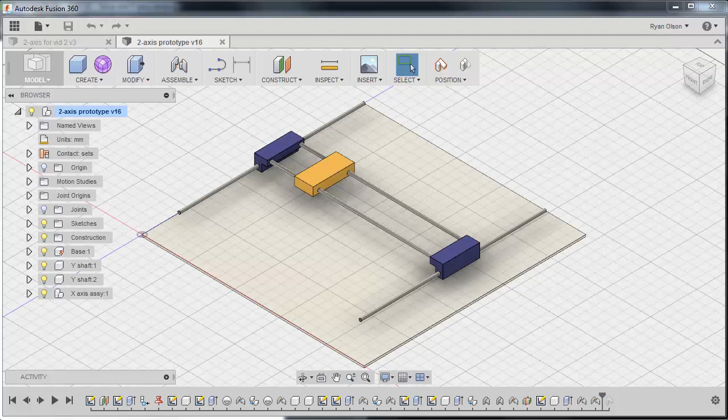I'm a product design engineer who's been using SolidWorks for about 9 or 10 years now. And recently I've been experimenting with a relatively new software package put out by Autodesk called Fusion 360. I think this package has a lot of potential, but it does require you to think a little bit differently from the way we're used to thinking in SolidWorks, Pro-E, Inventor, packages like that.

So with that in mind, I decided to put together this video series that shows the process of working through some modeling exercises in Fusion 360, specifically with a concentration on the way that some of the workflow and thinking changes for those of us coming over from a package like SolidWorks.

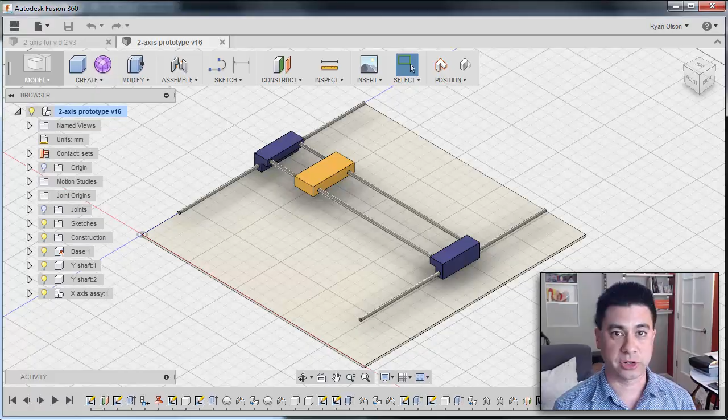So for this modeling exercise, I thought it might be useful to look at something like a very simple two-axis CNC machine. This is something that might be the basis for like a laser cutter or something like that. Certainly nothing revolutionary in terms of the design. It's very simple, but it gives us a lot of opportunities to look at different things in Fusion 360 related to the way that you would put together an assembly, the idea of mates or joints, and the whole idea of modeling in place, which is a big deal in Fusion 360.

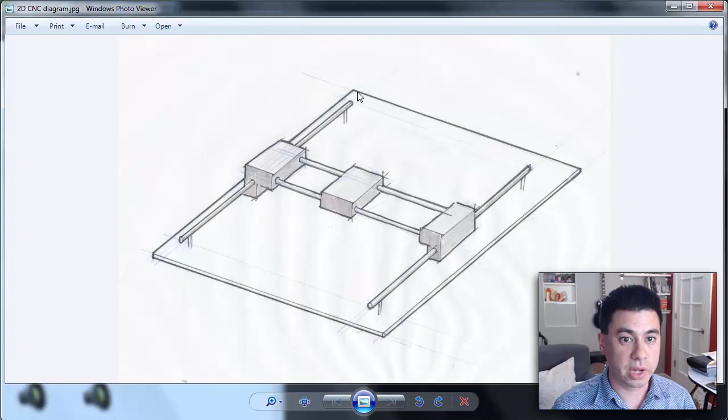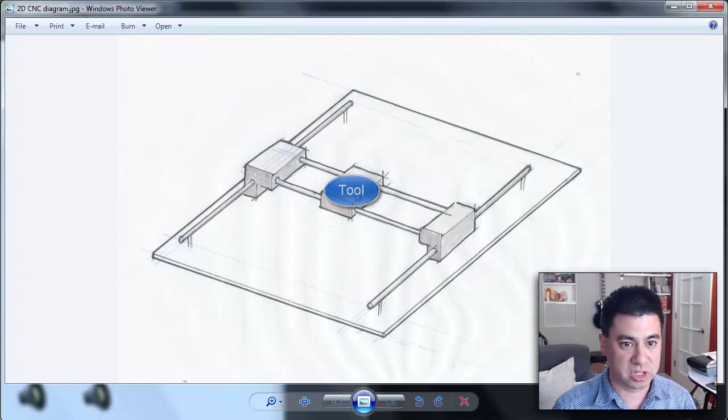So basically what we've got here is a tool bed, a couple of shafts which define the y-axis, and along those shafts run this subassembly that's the x-axis carriage assembly. So it'll slide in the y direction. The sled on the x-axis assembly can slide in the x direction, and that allows the tool, whether it's a laser or mill bit or whatever, that's on this sled to move anywhere in 2D around the tool bed.

We'll begin by defining a guide sketch, which will define the location of key components in our main assembly. We'll begin with a tool bed size approximately 600 by 600 millimeters. We'll also define two lines which will show us where the y-axis shafts lie with respect to the tool bed.

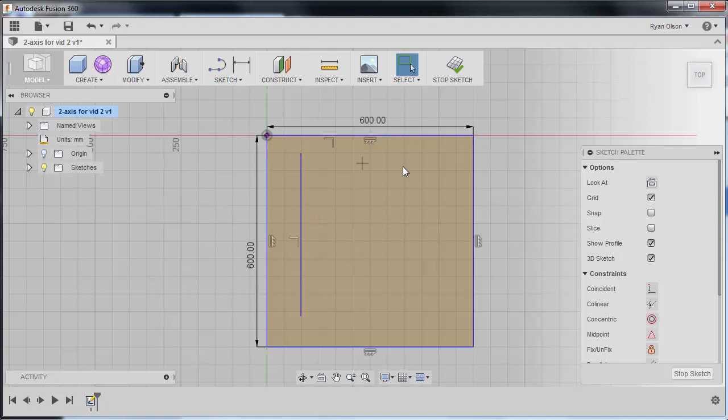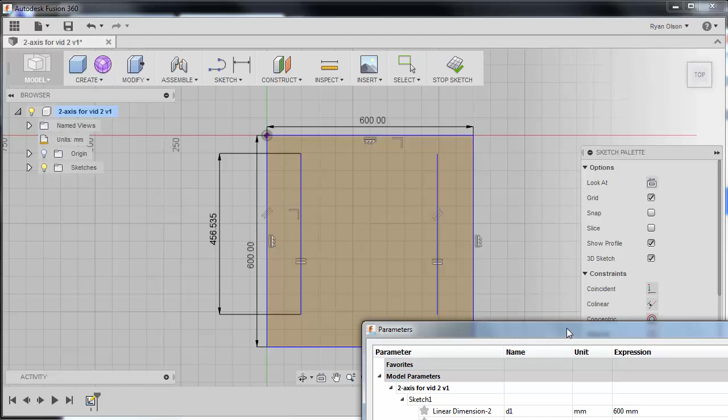We'll set these two shafts to be the same length. In this case, we'll be making these shafts from stock material we already have on hand, so it's our design intent for these shafts to be of a specific arbitrary length. We'll codify that design intent by setting up user parameters which define the length of these shafts. We'll define a new user parameter that represents the length of the y-axis shaft, and then assign the dimension from the sketch to use that parameter as its value.

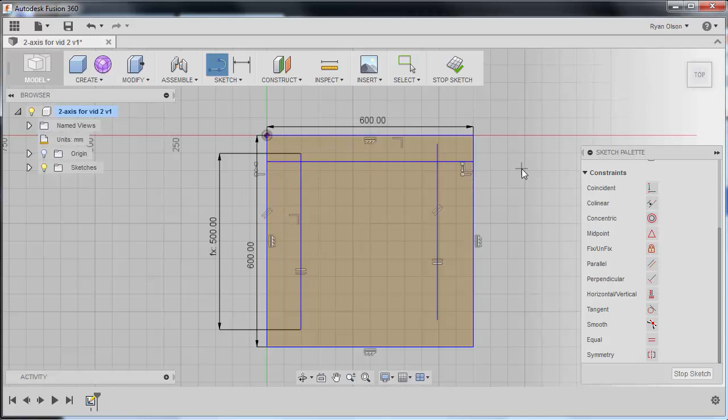At this point, we want to set up the positions of these y-axis shafts so that they are centered between the front and back of the bed. So we'll set up some guidelines to do that. There are several ways to position these guidelines such that the y-axis shafts are centered between the front and back of the bed, but in this case, let's do it using a formula.

We also need to define the amount that each y-axis shaft is inset from the edge of the bed. Normally I would do this with reference planes in SolidWorks, but in Fusion 360 it's easier to do this in a guide sketch, as you'll see later.

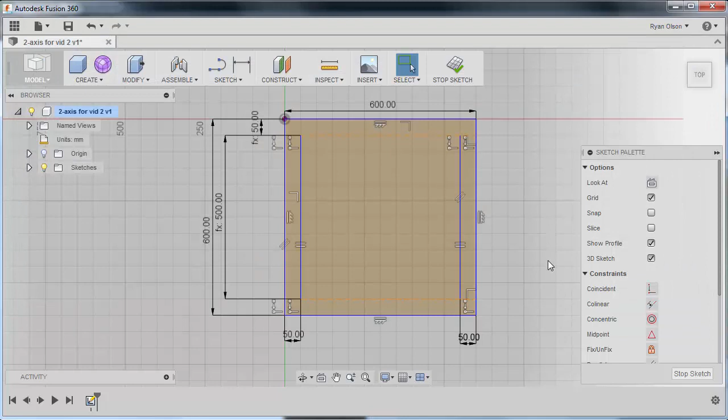Since I'll most likely be changing this as the design evolves, I'm going to favorite these two dimensions. This way they show up at the top of the list and I can find them easily. That's enough for this guide sketch for now. Let's go ahead and rename this guide sketch so that we can find it easily.

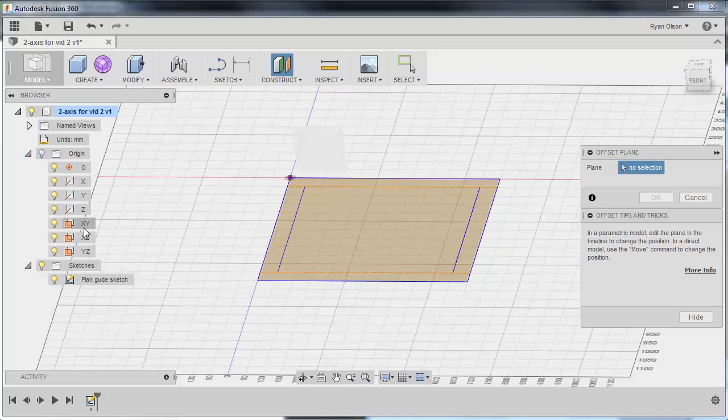The next step is to define a plane which will tell us how high above the bed the y-axis assembly resides. We can do this with an offset plane. Since this plane offset dimension is something that we're likely going to be changing during the development of the model, it can be useful to label that dimension.

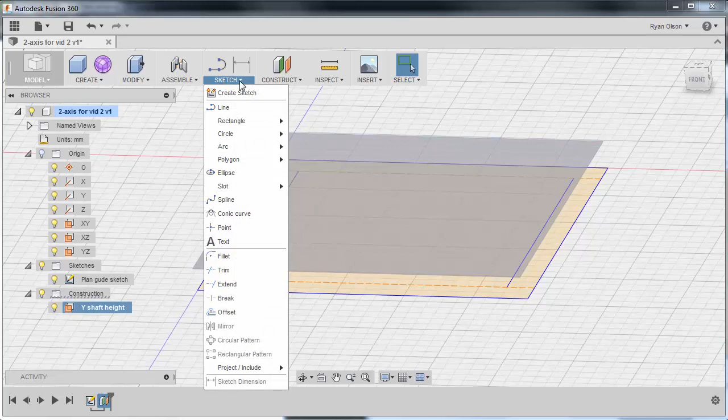Now that we have a plane defined for where we want to put the y-axes, we can project our two y-axis position lines onto that plane so that the lines will be in the right place in 3 dimensions. We'll use the project tool in the sketch interface, which works a lot like convert entities in SolidWorks. These 2 lines on this new sketch now represent where we want the Y shaft components to be in 3D.

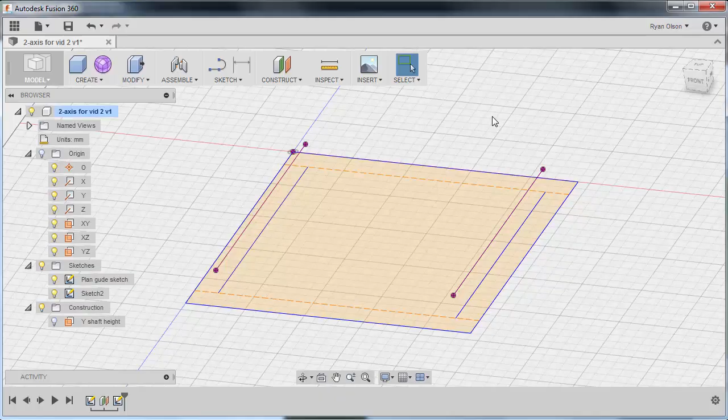At this point we should start adding some components to the assembly, so let's start with the tool bed itself. There are a few different ways to create components in Fusion 360, so I'll start with the most basic, which is creating a body and then converting it to a component.

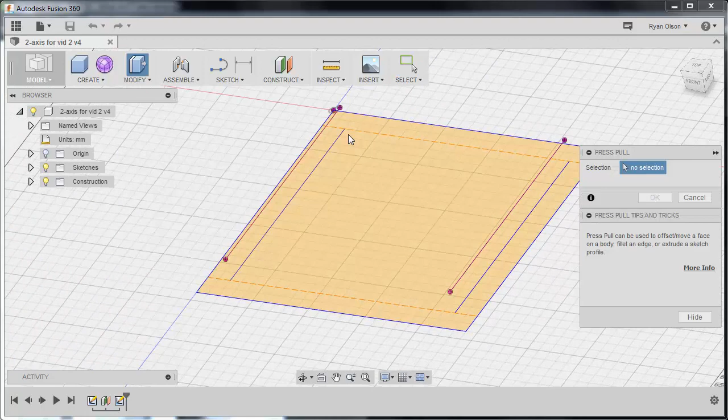We've now created a body at the top level of the assembly, but it's not yet its own component. By creating the component from the body, it is now absorbed into a new component, and the component is positioned where we want it.

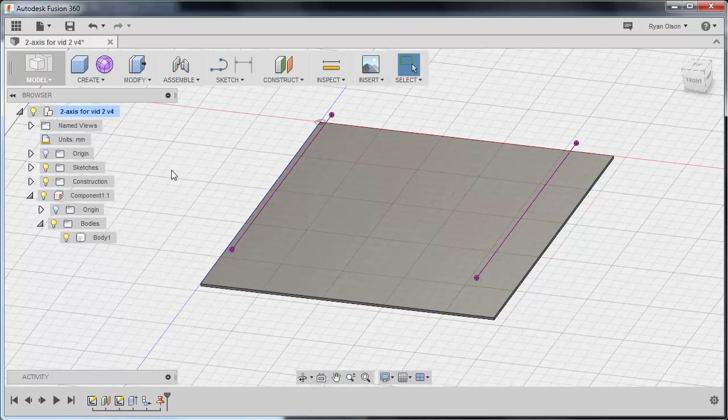In this case, we don't want the tool bed component to move relative to the origin of the assembly, so we're going to ground it, which is like fixing a component in SolidWorks. We'll go ahead and give this component an appropriate name and then hide it so that we can add the 2 y-axis shafts.

We can now look at a couple different ways of adding the Y-shaft components. SolidWorks users such as myself might be inclined to do it by creating a new component and then positioning that component within the assembly in the place that we want. And indeed, that is possible in Fusion 360, as I'll show here.

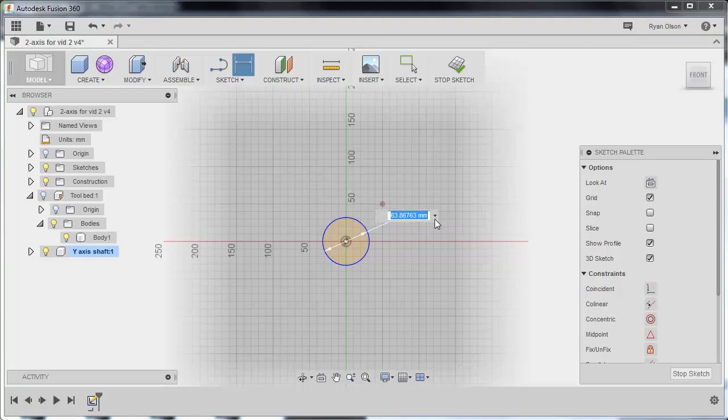We'll create a new component. We'll activate the component to make sure that we're working within this component. While we're dimensioning the shaft diameter, we should probably set up another user parameter, since this is something that could also change through the evolution of the design.

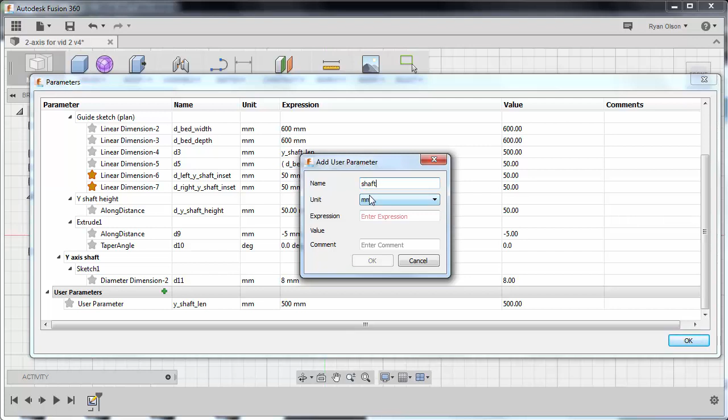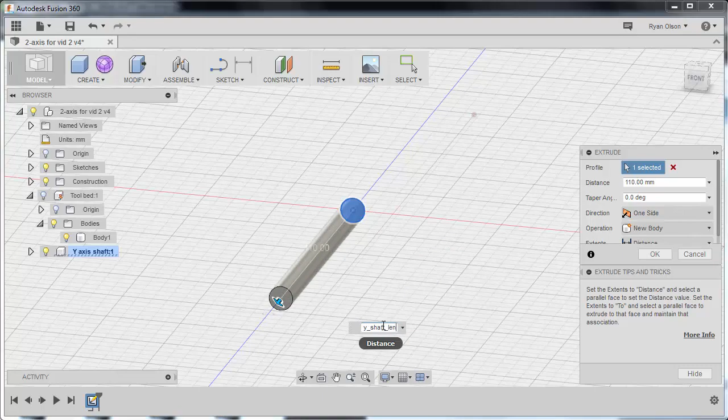Now that we have our profile sketch, we can extrude it to create a shaft of the desired length. We now have a component with its origin at the assembly origin that contains one body, which is a shaft of the proper dimensions. However, it's not yet positioned correctly in the context of the assembly.

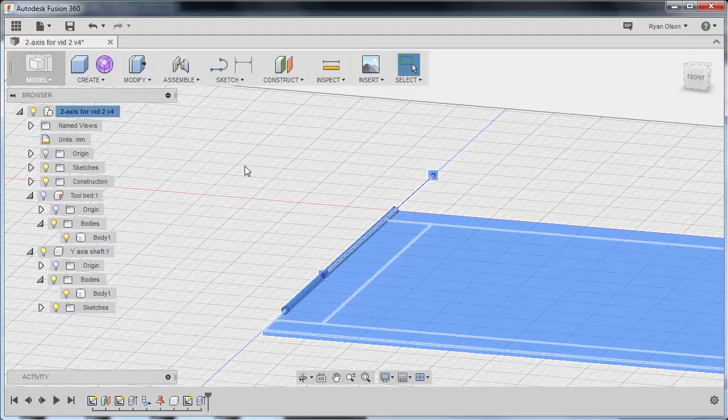Since the component isn't mated or jointed to anything, we can move it freely within the assembly at this point. However, notice that once we do move it, we have the option to revert it to the original position or create a snapshot feature which will record the new position of the component. This will become very important later on.

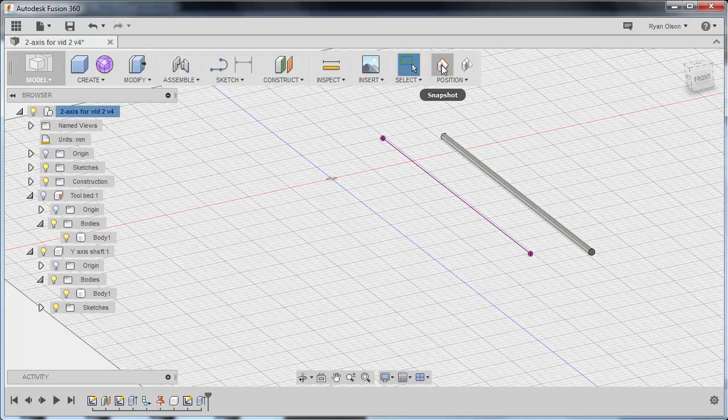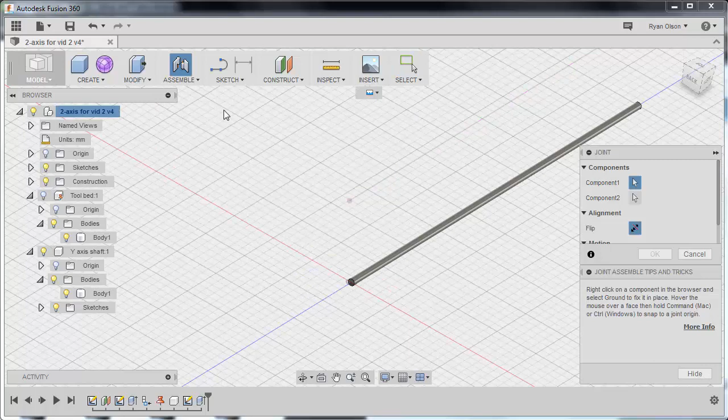What we want to do here is to mate this component with the y-axis guideline that we created before. This can be done using a rigid joint. As you can see, we've got the location right, but the orientation of the joint is wrong. This is because the joint origins of this rigid joint aren't properly aligned. We can fix this easily by adding our own joint origin.

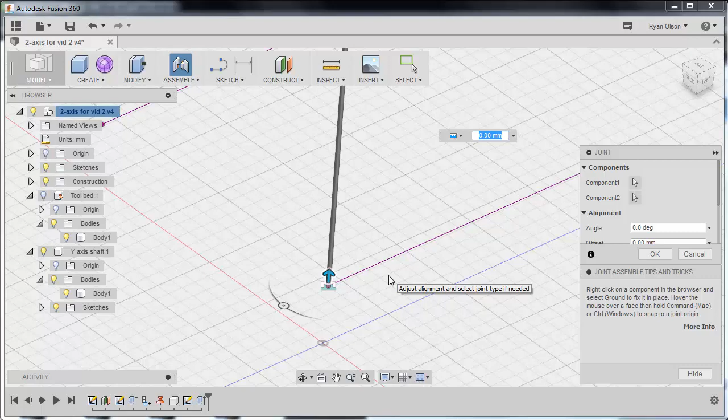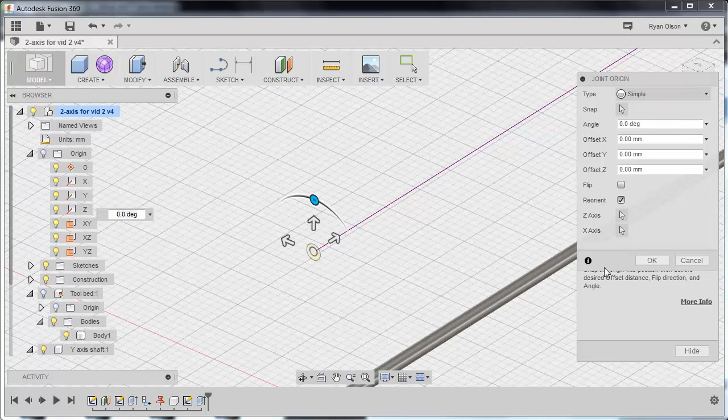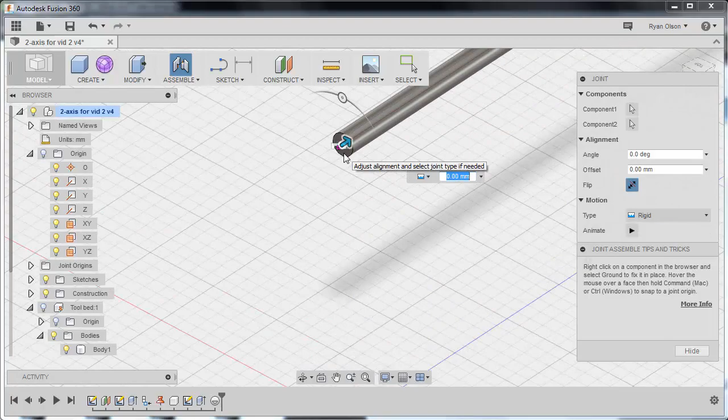The joint origin is now located where we want it to be, but we need to reorient it. Now that we have a custom joint origin in our assembly, it's an easy matter of mating the shaft component with that joint origin, which belongs to the parent assembly. This component is now rigidly jointed to the assembly and will follow these guidelines if we were to change them.

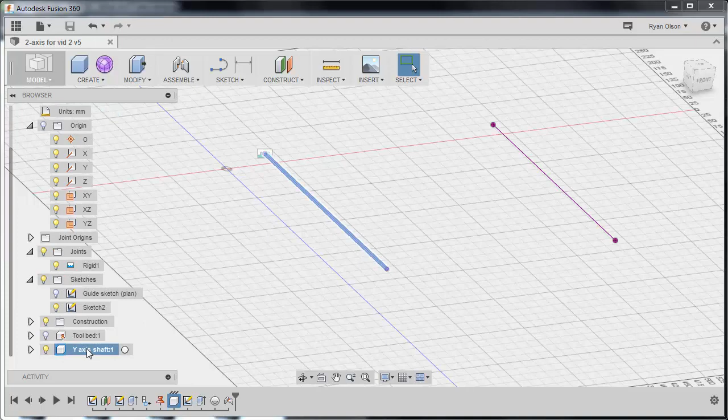We now want to place another instance of that component at the right-hand side Y-axis shaft location, which is simply a matter of doing a copy and paste. Control C, Control V. Now notice that I've moved it to approximately where I want it to be, but it's not yet jointed to this guide sketch. So if I were to change the sketch, the component wouldn't move with it. We need to set up the proper joint.

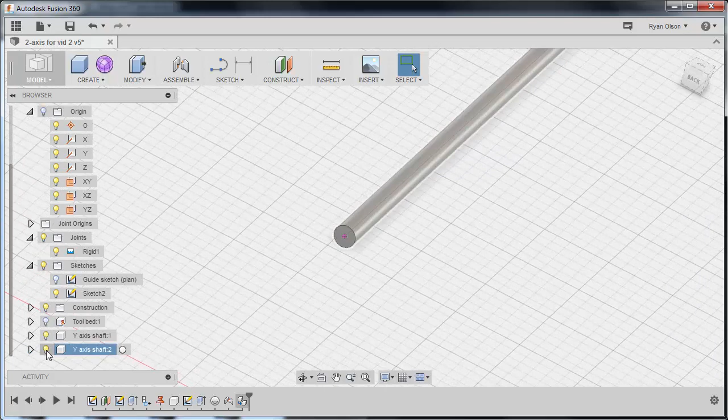To do that, I need to set up a joint origin on this guideline as well. And now we can establish the joint. Note that I've moved it out of the way temporarily just so that it's easier for me to click on this, but I'll get a warning about the fact that I've changed the component's position as I do the joint.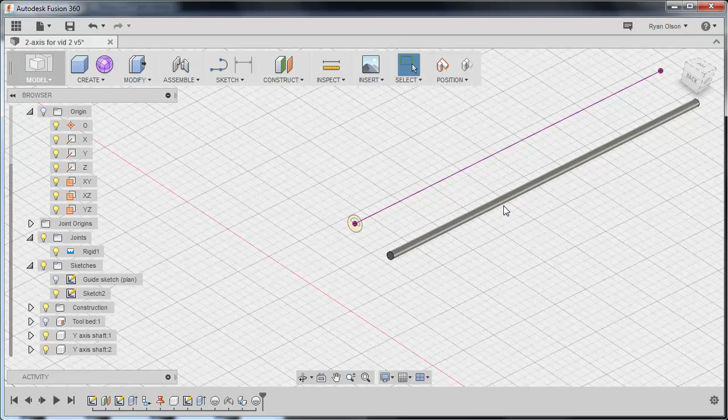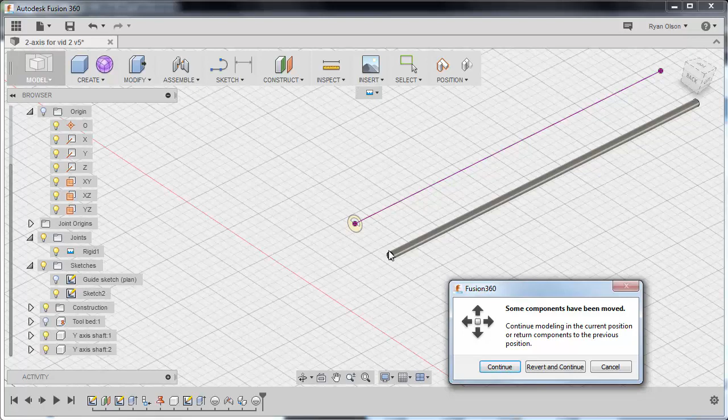So this warning that comes up is basically just reminding me that I've manually moved this component from the position in which it was originally created, which was through that copy operation. And it's asking, do I want to put it back where it was in terms of the feature tree, or do I want to continue with where I've moved it? And in this case, I just want to continue because I moved it just to be able to select it more easily. So the first component is the one that's going to move. I'm mating it to my new joint origin.

And now both of these are in place. It is important to note that these are two instances of the same component. Even though I used a copy operation to create the second one, it didn't disassociate the second component from the first one.

So what I've shown here is a good approach to take if you're used to modeling components separately and then later bringing them into an assembly. Or if, for example, you've already got a model from somewhere else, or you're working off a model that was made to represent stock material you already have. This method of bringing it into the assembly and then establishing a rigid joint to a guide sketch is a

good way to go. However, Fusion 360 was really designed with in-place modeling in mind, and in a case like this, it can be a much more efficient approach to modeling. So I'll show how to do that next. Let's actually roll back here. We'll get rid of the shaft component that I had created, so I'll just roll it back and then say delete all features after history marker. And we'll go ahead and model this in place instead.

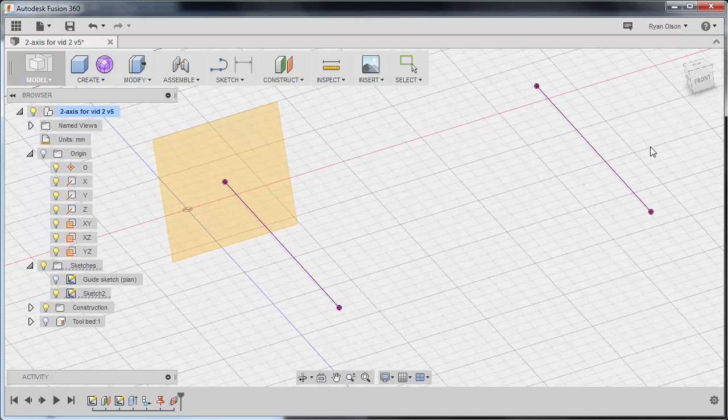Again, I have only one component, which is the tool bed. It's hidden right now. I'm working in the main assembly, and what I'm going to do is draw a sketch at this point and extrude it out to this point, therefore using the guide sketch to extrude the geometry. So the first thing I need is a plane. I can now sketch the profile on this plane. And I can extrude it out.

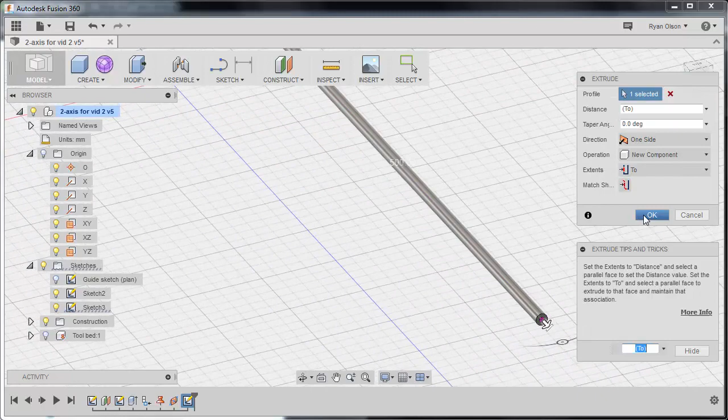A couple ways to approach this. I could either extrude it and use the to extent to go to this point, or I could extrude it at distance and type in my shaft length. It's basically going to end up with the same thing. More importantly though, for my operation, I want to say new component, so that I'll be creating this body and a new component to hold it in one operation. So with that one feature, I've got a new component which has in it the body of the shaft at the proper dimensions.

Now, even though we've modeled this component in place, it still actually isn't jointed to the assembly in the way that an in-place mate would lock down a component modeled in this way in SolidWorks. So it's simply a matter of adding what's called an as-built joint. So at this point I can still move the component around. It would remember the position and allow me to revert it, but I actually want a joint here. So we'll go up and do an as-built joint.

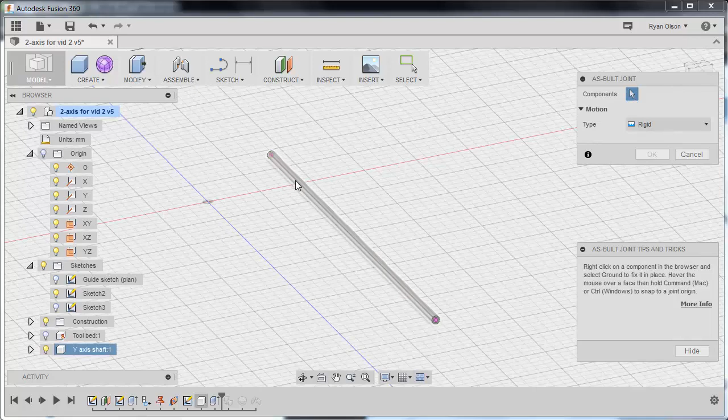And all I have to do is select the component and the parent component, which is the parent assembly, and click OK. At this point, the component is actually jointed to the guide geometry. And again, if we were to change anything about the guide geometry, the component would go with it. So for example, we could go and change the height of the Y shafts above the bed,

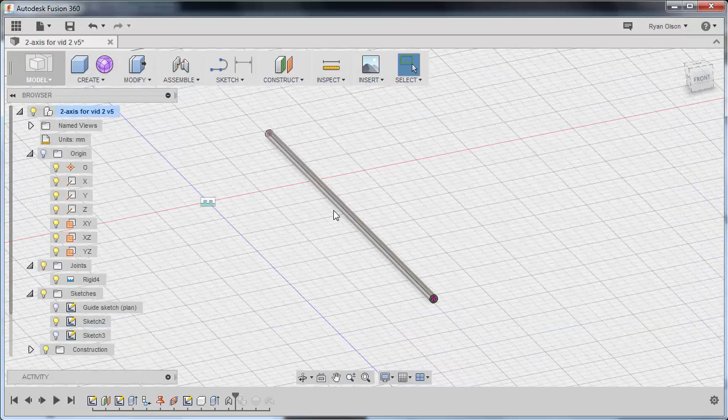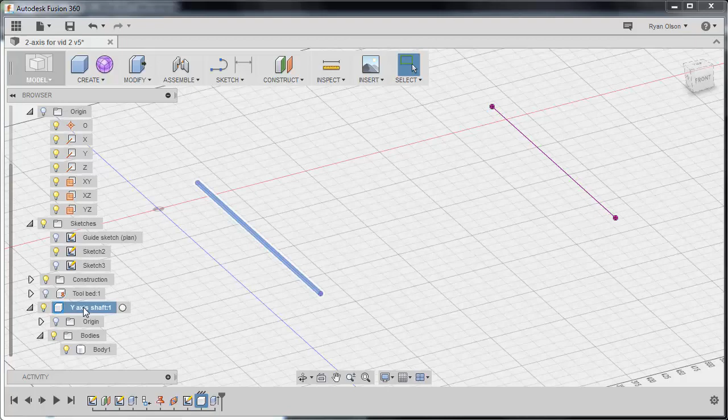and it updates accordingly. Now to create the shaft on the right-hand side, I could just create another component doing the same thing, but I really want these to be the same component. So I'm going to do the same copy operation that I did before and manually joint the second shaft to its location in the assembly. Control C, Control V.

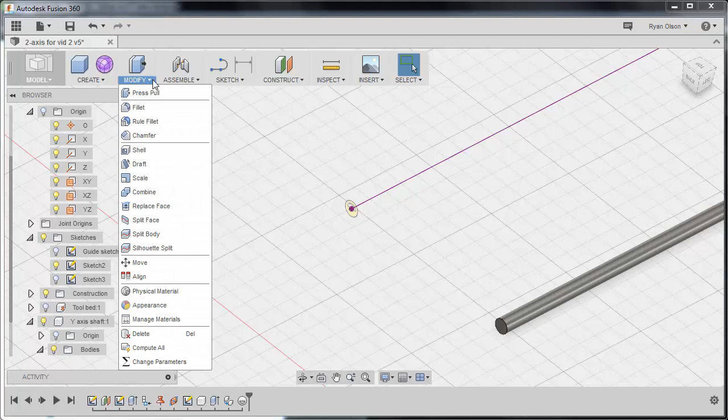Set up our joint origin. In this case, it appeared to allow me to select the origin in the orientation that I wanted, so I'm just going to go with that. I will admit I don't totally understand how these joint origins are selected and manipulated yet. And so you can see that I now have two instances of the y-axis shaft again in this assembly.

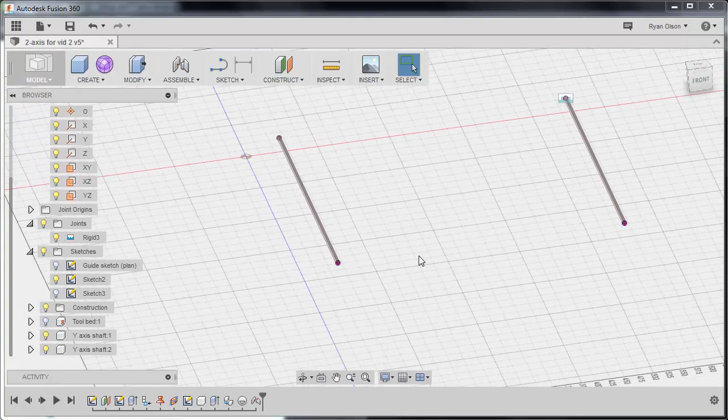So I think that's definitely enough for this video. In the next video, I'm going to show how we can start modeling some additional parts of these mechanisms, the sleds that slide along these axes, and the parametrically defined x-axis shafts whose length is determined by this guide geometry. So look out for that in the next video.